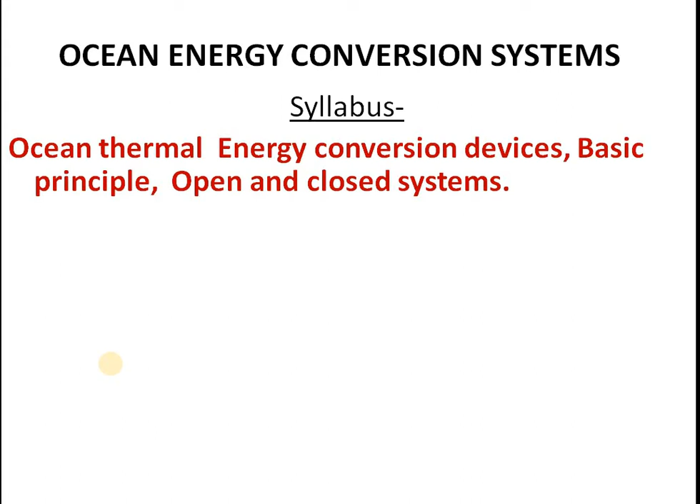And in the second part, we will see about ocean tidal energy conversion system. Energy from tides and basic principles of tidal energy. As we know, all of you know what is tides and the neap tides and high tides. So what is the reason for those tides? Such tides are natural phenomena which involve a lot of energy. So these tidal changes can be translated efficiently, skillfully with suitable engineering technique into energy, essentially electrical energy. Okay. So we will come across such methods, tidal energy conversion in another section.

And in the third section, we will see ocean wave energy conversion system. So wave is a very common visible phenomenon on the ocean surface compared to thermal energy phenomena or tidal energy phenomena, very obviously visible phenomena. You must know that those waves are basically a sort of phenomena which transfer energy from one place to another. Wave is a method to transfer energy from one place to another. So those energy can be very beautifully converted into electrical energy.

Wave motion can be suitably applied on certain engineering gadgets, and we can make some motions. Those motions can be properly levered to some generators, and the generator can be spun suitably. This spinning motion will lead to production of current. So all these three methods are marvelous engineering technology of the modern era, which provide electricity to many places all around the world. They are still in the growing stage, but many efforts are being successful.

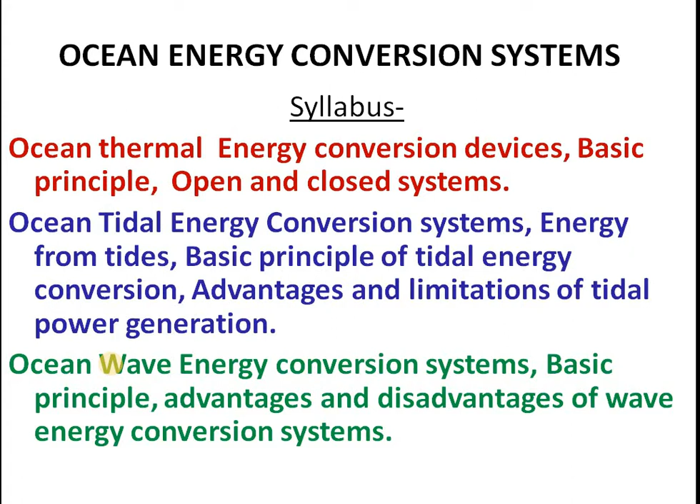Okay, so we will see one by one, starting with the ocean thermal energy conversion. Okay, that is known as OTEC. Briefly this acronym is OTEC, and ocean tidal energy conversion system, that is also briefly known as OTEC, but there is a difference in the expansion. And the third one is the OWEC or ocean wave energy conversion system. Separately, we will look into the details, starting with the ocean thermal energy conversion system.

As we know, the vast ocean is exposed to sunlight during daytime. The entire solar energy is getting absorbed by the water in the ocean. So it's a vast collector of solar energy, we can say, just like the solar panels we studied in the solar energy devices. And a very interesting phenomenon is that on tropical regions, that means the regions which are closer to the equator, where we get most of the sunlight compared to the other regions, I mean the polar regions. On tropical regions near to the equator, solar radiation is available mostly throughout the year.

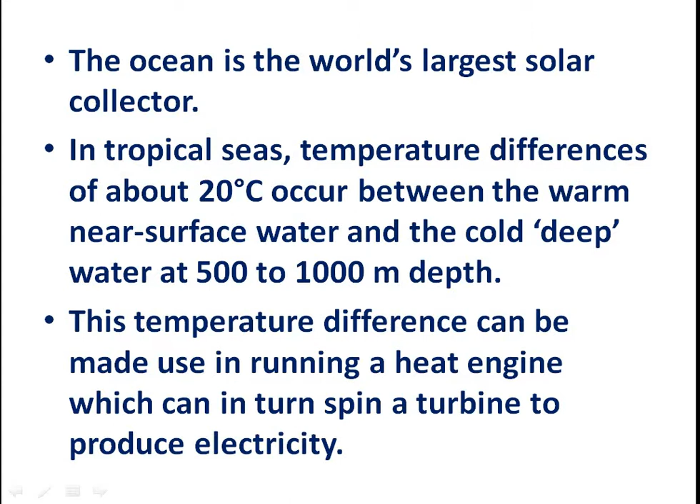So that means that there is a hell of difference in the temperature on the top and bottom of the ocean. So this particular difference in temperature can be very skillfully used in certain heat engines to rotate certain turbines. Okay, the temperature difference can be made use of in running a heat engine which can in turn spin a turbine to produce electricity.

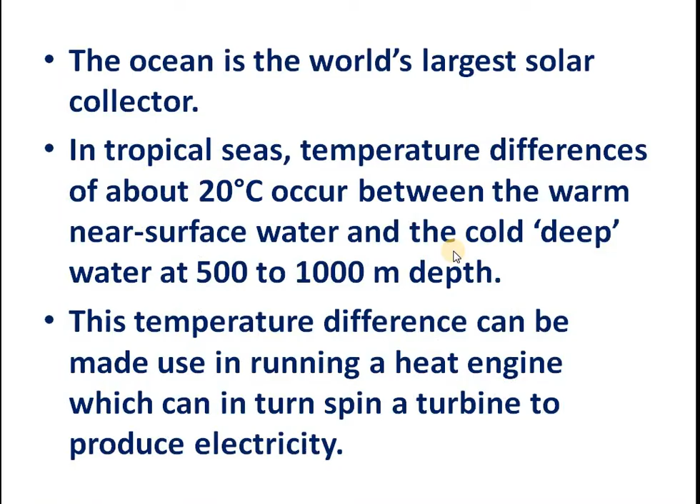So let us see what is the engineering technique used to convert that heat energy. Okay, so we have a machine. The machine is an OTEC machine. This is a schematic diagram of such an OTEC device.

So this is the region where the working is happening. Actually, there will be some fluid, some liquid. We will go to the details of the liquid very soon. The liquid is running through these pipes, and here is your turbine, and here is a generator. As I told you, on the upper layer of the surface, the water is hot. Assuming you take around 27 degrees Celsius.

The hot water is circulated through a certain exchanger. This is what is called an exchanger. And here what happens, the liquid is other than water, some other fluid. The details we will see shortly. The fluid will be heated up due to the high temperature.

You may see 27 degrees is a high temperature for such liquids. So what happens, those liquids, their boiling point may be some minus 2, minus 3, minus 4, like that. Such a liquid will easily boil, and they form superheated vapor, and that vapor is of high velocity.

Whatever vapor, not of course water steam, but some other vapor, high pressure vapor of some other fluid, that will be spinning the turbine here. So after spinning, the steam, that vapor, has got cooled down. It is further cooled by the low temperature water coming from the depth of the ocean.

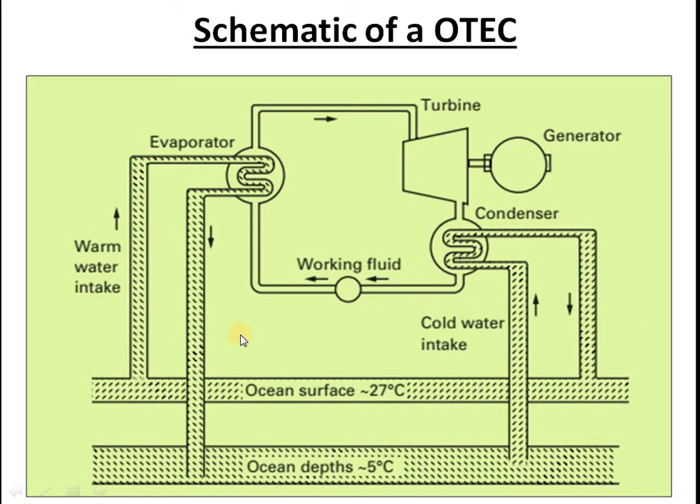So you can see that here we are using both the hot water of the upper surface of the ocean, and we are making use of the cold water from the lower part of the ocean. So both are of use. Upper surface around temperature 27 degrees, and the lower surface temperature around 5 degrees Celsius. These are some of the important data, important ideas. We will again discuss and explain it very soon.

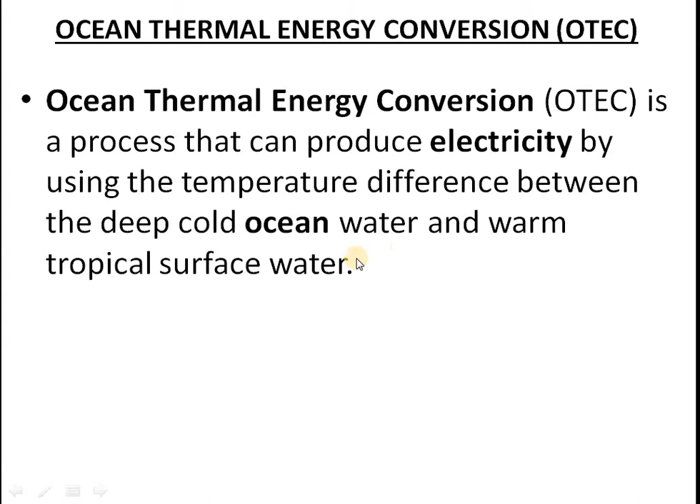So the thermal OTEC is a process. This all thing we have already discussed. Using temperature difference is made use to heat up either water or some other liquids. So here you can see it given in a more lively manner with an animation, how this is happening.

You have a cooling liquid here. For the time being, let us call it a cooling liquid. What is the liquid? We will see very shortly. This liquid is being made hot and made into vapor form, high pressured vapor form. Then only this will be spinning.

How is it made high pressured vapor? By using the hot water from the sea surface. Because during daytime, solar radiation is directly exposed to the liquid water, so water will get high temperature. Just like when you stand nearby to a sea during daytime, you feel very hot. The reason is that the water on the surface gets heated up due to solar irradiation.

So that hot water is used to heat up the liquid here, and the liquid spins the turbine. After the liquid energy is lost, it is brought here. This is the second heat exchanger. Here, you bring the cold water from the very bottom of the sea, and it is cooled further.

Your liquid is cooled further, and after that the warmed cold water is again left back to the upper surface of the sea. Once it is cooled, the liquid is again pumped to the first heat exchanger. Again it is boiled up and used for rotation of the turbine.

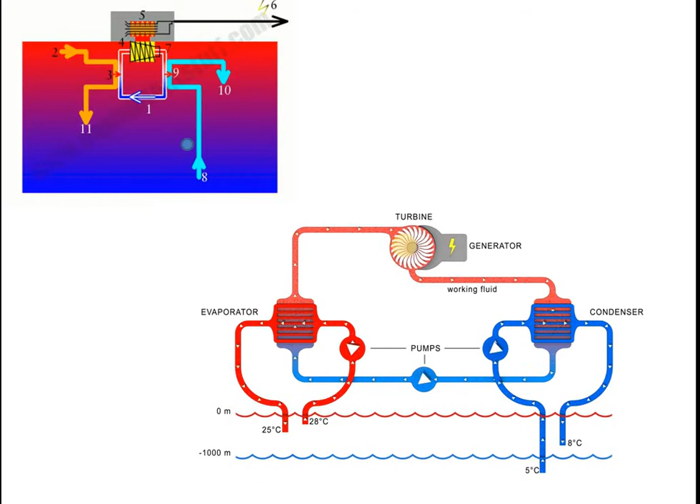So the principle, I hope, is clear. This kind of device is usually called a closed type OTEC system. Closed OTEC system, because here the liquid is not open to outside. Whichever liquid is flowing through, it is not open to the outside world. That is why it is called closed. And there are open systems also. We will talk about it later.

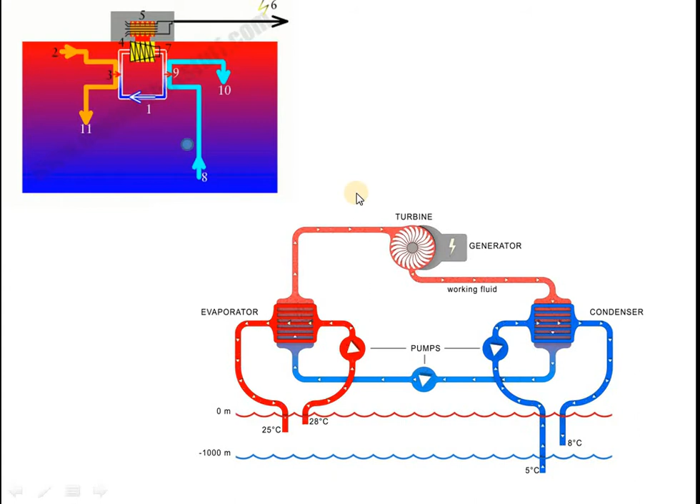Okay, so let's have some brief history on it. Actually, all the pioneering efforts started around 1880, and it was J.A. Arsonval, a French scientist and physicist, who proposed the theory of tapping the thermal energy of the ocean for power generation.

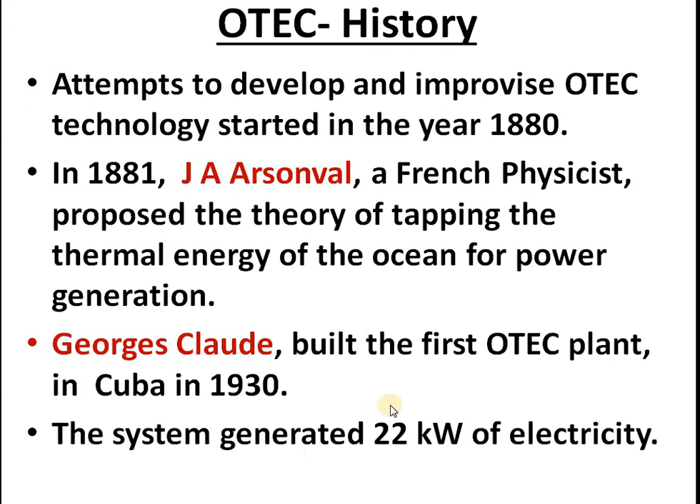So a French engineer essentially. He was both a physicist also. And the real practical OTEC plant was made in the year 1930 by Georges Claude. He was a physicist actually, a thermodynamics physicist. He made the first OTEC plant in 1930 in Cuba, which could generate around 22 kilowatts of electricity. Okay, it was a major victory at that time.

And currently Japan is the major pioneering country involved in the development and engineering of OTEC. They have installed many such plants in different parts of the world. In 1970, Tokyo Electric Power successfully built and deployed a 100 kilowatt closed cycle OTEC plant on the island of Nauru. Nauru is an isolated island near the continent of Australia.

It's an isolated island where no other power sources are available: no rivers, no thermal power plant, no nuclear power plant. They depend purely on solar electricity and OTEC electricity. Nauru is a very small island near the Australian continent. So that was the first mission of the Japanese company.

And in 2002, India tested a 1 megawatt floating OTEC pilot plant near Tuticorin in Tamil Nadu. And even today India is involved very seriously in OTEC research, in developing new technology in the frontiers of OTEC plants, in different parts of the Indian continent.

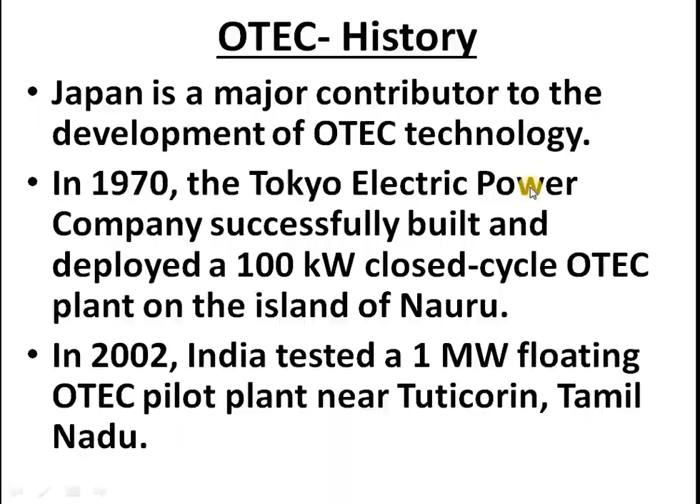And this is a typical, exaggerated view of an OTEC system. You can see cold water is taken up from deep water, and here power generation is carried out by taking surface water. This kind of plant in the sea is called an offshore OTEC system. And you can even have an onshore OTEC system, where you take the cold water using long pipes from the depth of the ocean and hot water from the surface of the ocean. Both are made use of in the circulation process.

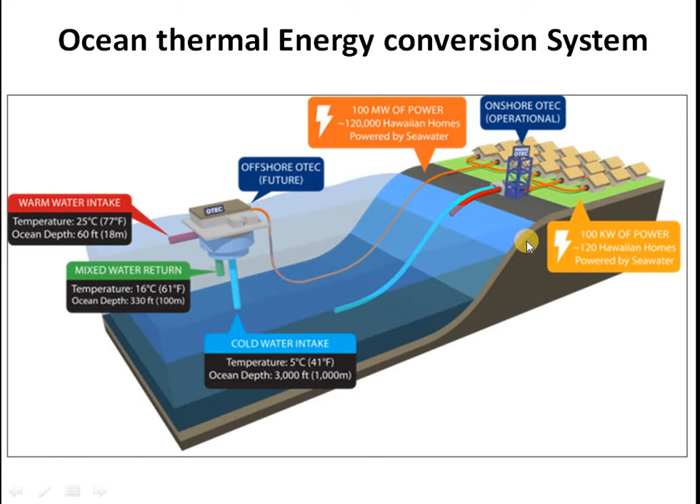And finally the hot liquid formed is used to rotate turbines in different powerhouses, where electricity is generated. So both offshore and onshore plants exist in different parts of the globe. This is a typical over-exaggerated view for better understanding of the OTEC system. This blue region is entirely the ocean, a big ocean, and in fact this is an important idea.

There is enough heat in the upper layers of the ocean water to meet all of mankind's energy needs hundreds of times over. So the entire needs of mankind can be met with OTEC energy. In fact, if you properly tap the OTEC energy available all over the ocean, that is enough for all our power requirements. But because of lacking infrastructure or the problem of initial investment, people are not taking up such huge projects. But it is a fact that enough energy potential is there for OTEC plants. So that is the future of OTEC.

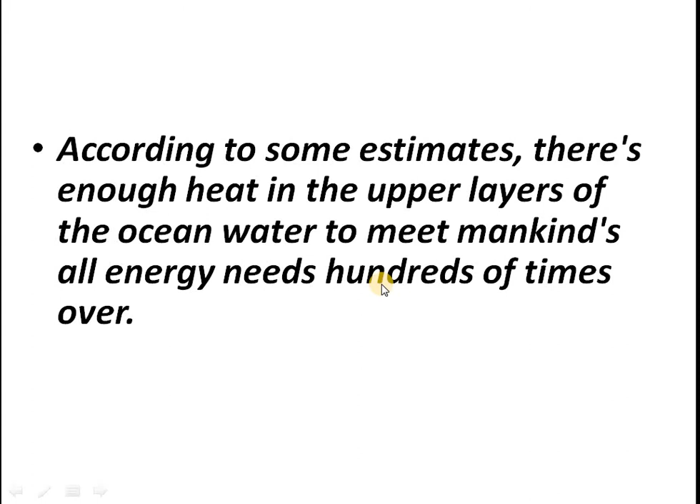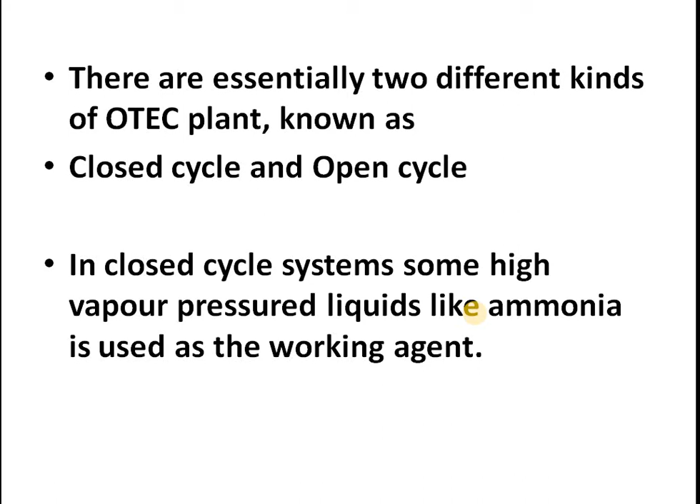And there are essentially two kinds of OTEC plants, as I told you. One is called closed cycle OTEC and the other is called open cycle OTEC. In closed cycle OTEC, high vapor pressure liquids like ammonia are used as a working agent. That is a specialty. Earlier I told you that we will discuss that liquid in detail. The liquid is essentially ammonia. So what actually is ammonia? Ammonia is made up of one atom of nitrogen and three atoms of hydrogen. Its chemical formula is NH3, and it has a highly pungent odor. If you smell it, it feels very pungent, penetrating. So it is not so healthy for the human body.

And its boiling point is very interesting, minus 33 degrees Celsius. That is the key point of ammonia. At minus 33 degrees Celsius, ammonia liquid starts to boil. So you can imagine what can happen at 0 degrees Celsius. It will boil heavily. So when you come to 27 degrees Celsius, because the average ocean water temperature is around 27 degrees Celsius, as we have seen in the previous slide, you can imagine how strongly, ferociously the ammonia liquid will boil and evaporate and form strong, highly pressurized vapor.

So this highly pressurized ammonia vapor can be used to rotate turbines. That's the most interesting part. And of course ammonia is much lighter than air. So if you expose ammonia to free air, it will immediately go up because it is lightweight. Because of all these reasons, ammonia is mostly used in the closed type OTEC system. So the ammonia will be filled in this chamber.

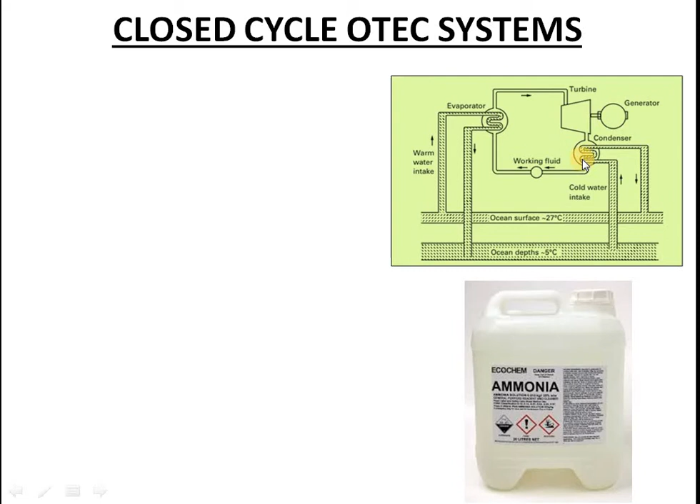So such plants are usually built with a lot of precautions and care. Otherwise, even a small blast may lead to accidents and other unhappy incidents. So ammonia or some other low boiling liquid flows around a closed loop at the heart of the system. This is that closed loop.

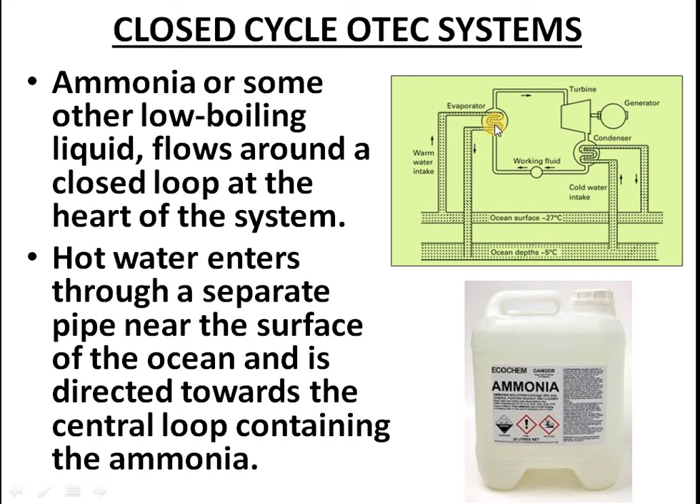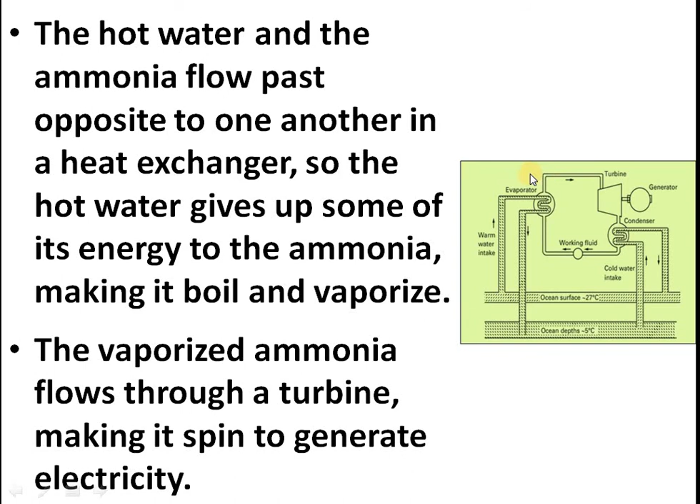Hot water is going down and ammonia is going up. So as the ammonia goes up, it gets more heavily heated. The hot water gives up some of this energy to the ammonia, making it boil and vaporize. You get vaporized ammonia here, which flows through a turbine, making it spin to generate electricity. The turbine spins a generator and converts the energy to electricity.

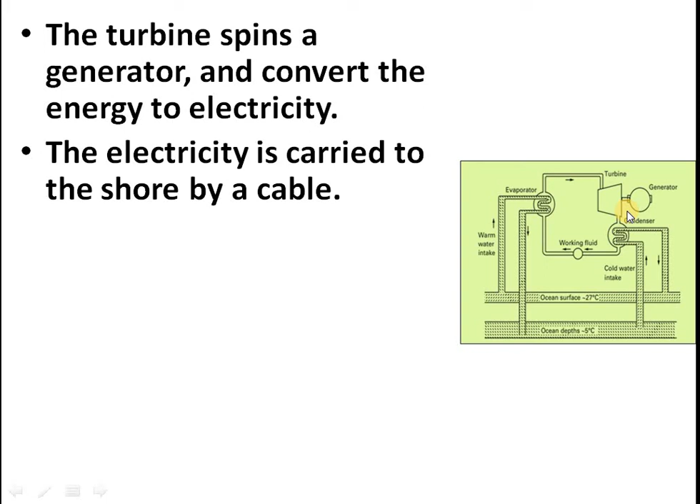Electricity is carried to the shore by cable. If it is an offshore system, we have to install the cable along the underground of the ocean. And if it is onshore, no problem, you can directly feed it into any grid lines.

Now the expanded ammonia vapor has given up much of its energy. After doing work, once ammonia does some work, its energy is lost. So what happens? The hot vapor now converts into liquid, and this liquid is further cooled by running water coming from the depth of the ocean.

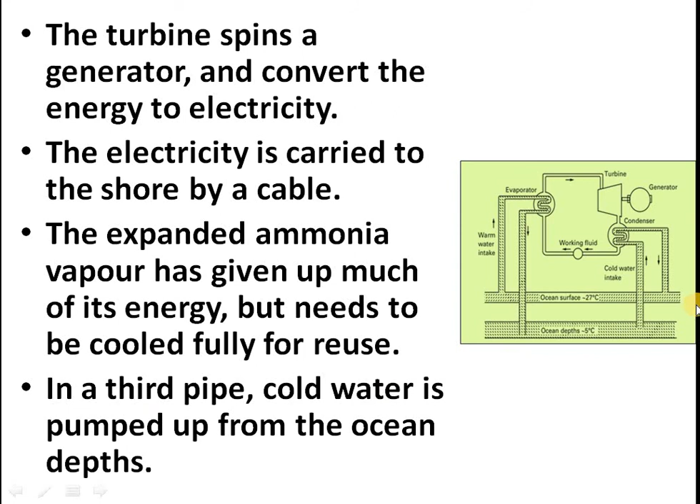But it needs to be cooled fully for reuse. If you want to reuse it, you have to further cool it down and make it perfect liquid. That is the purpose of this cold water pipe, which is run through the system.

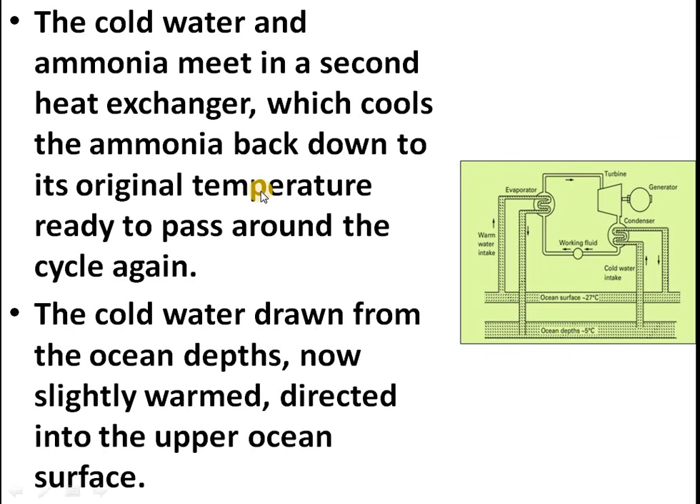So the cold water and ammonia meet here, with cold water going up and ammonia going down. They meet together, and ammonia is thereby cooled down. This cold water is now directed into the upper ocean surface.

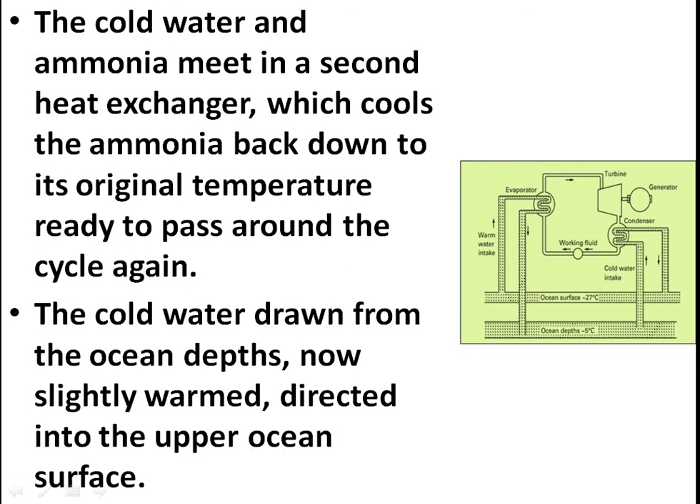This cold water is now slightly warm or hot, so you cannot straight away drop it into the bottom of the ocean. So it must be dropped at the upper layers of the ocean. This is the entire process happening in a closed cycle OTEC system.

Very interesting, used in many running systems in many countries. The second type of system is called open cycle OTEC system. Here we don't use any such ammonia-like liquids; water is used instead, and its detailed working we will see in the next class.